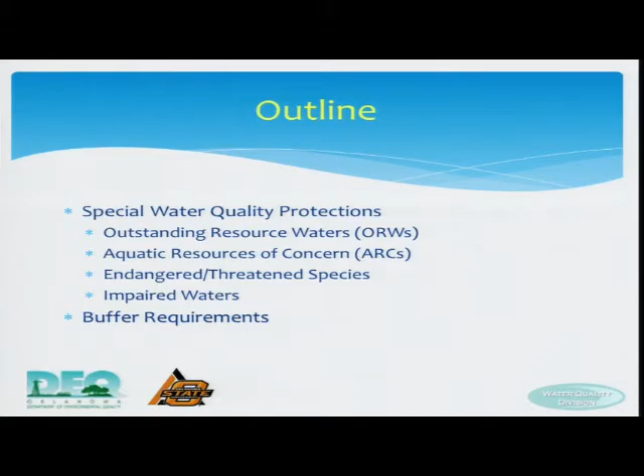So a little bit of just an outline of what we're going to talk about. We're going to go through in more detail special water quality protections. We talk more about ORWs, ARCs, outstanding resource waters, aquatic resources of concern, endangered and threatened species, impaired waters, and then we're going to go through the buffer requirements. And then Dr. Vogel's going to follow me up, and he's going to talk about the models that are available to calculate sediment load reduction.

So special water quality, we've covered a lot of this already today, so we'll kind of go through this a little bit quickly. I don't think you guys will mind too much if we end early. I don't know. I think you guys will be okay.

So ORWs, again, waters of the state designated in Oklahoma water quality standards include Illinois River and Lee Creek watersheds, as well as the Mountain Fork River watershed. Addendum F of OKR10 indicates the locations.

We also tried to pull up FlexViewer, which is why we're having so many difficulties with technology. We wanted to get internet access and we didn't have it, so we can't go through that. We're hoping we can get that resolved tomorrow and go through a live demonstration of how to use our FlexViewer on our website. So fingers crossed that that works, and if you won't be here tomorrow, I apologize that we couldn't make that happen today.

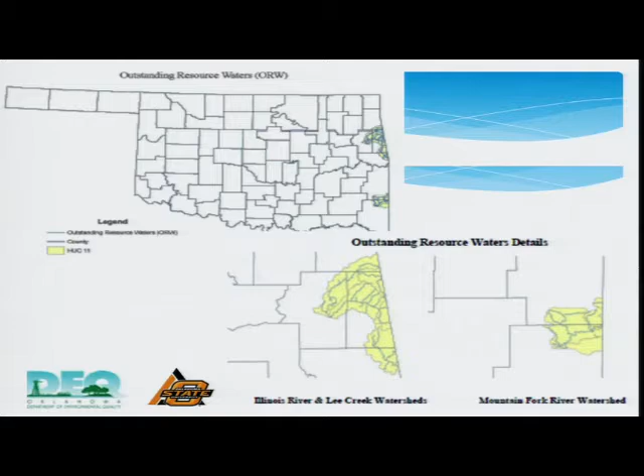The map you guys should be familiar with, showing where Illinois River and Lee Creek watersheds are located, as well as the Mountain Fork River watershed. The aquatic resources of concern include sections of the following that you can see here, such as the Grand Neosho River, Cimarron, South Canadian, Mountain Fork, Spring River, Illinois, etc. That includes certain watersheds as well.

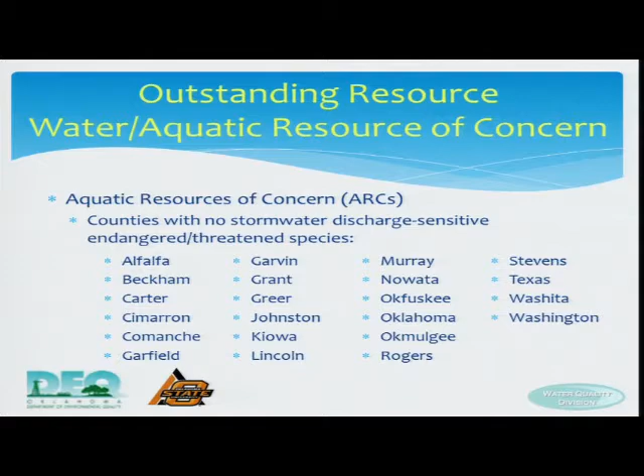What you should note is that there are certain counties that don't have any stormwater discharge sensitive endangered or threatened species. And those are listed here. So if you're working in one of those, you're not in an ARC. So that's good to know. All right. The updated map is here that shows the watersheds that are aquatic resources of concern.

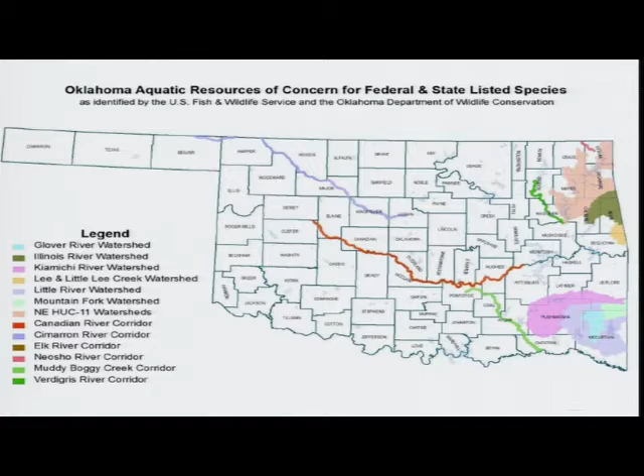Again, what are these requirements that we have for these ORWs and ARCs? Make sure that you indicate that you're in one of these on your notice of intent and address it in your SWP3. I talked about that before. The inspection requirements are a minimum of once every 7 days and within 24 hours of a stormwater event of ½ an inch or greater, or within 24 hours of snowmelt related discharge, like Michelle was talking about in her presentation.

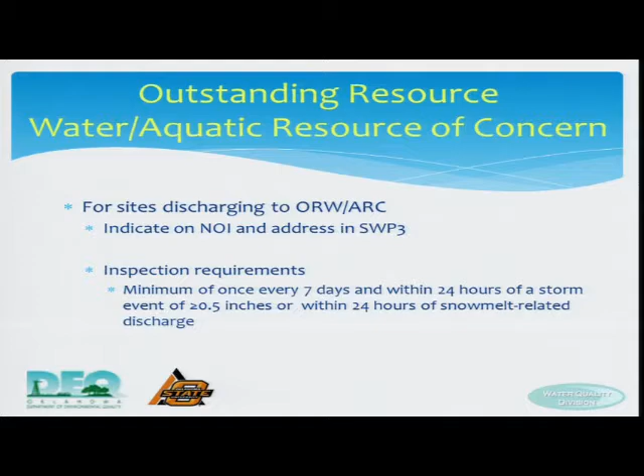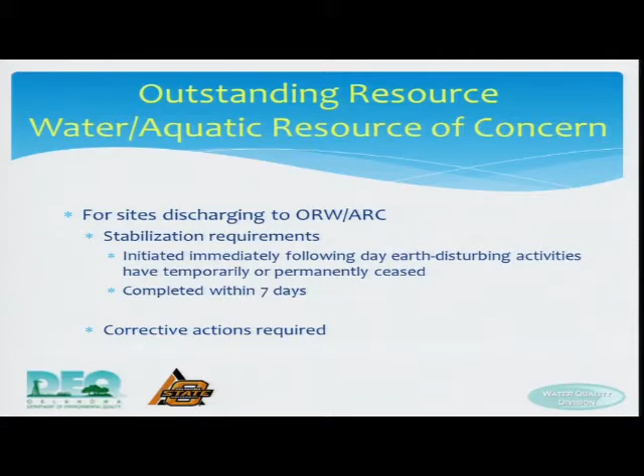Stabilization requirements for your sites if you're in these watersheds, like we talked about, they should be initiated immediately following the day earth disturbing activities have temporarily or permanently ceased. So again, the emphasis here is on getting cover in place as soon as you're done disturbing it to minimize the sediment that's exposed. And then complete those stabilization requirements within 7 days. Corrective actions are required, as Michelle talked about in her presentation.

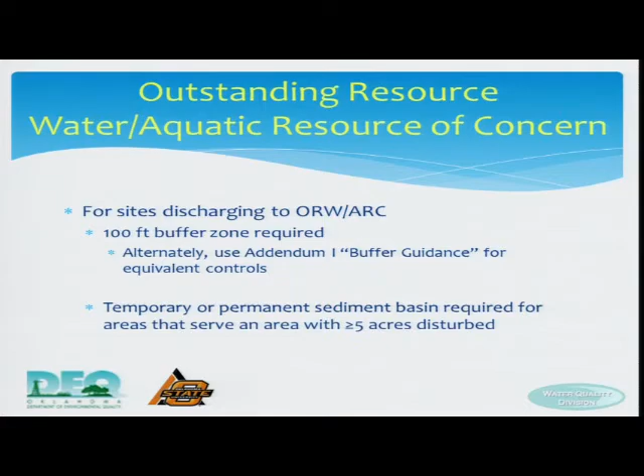For sites that discharge to ORWs or ARCs, there's a 100-foot buffer zone required. We touched on that a little bit this morning. And if you can't provide the entire 100 feet from the water that's adjacent to your site, as an alternative, you can use Addendum I, which is a buffer guidance that we included in the permit to determine what kind of equivalent controls you could put in place instead of providing that buffer.

And then again, with the sediment basin, either a temporary or permanent sediment basin should be provided for areas that drain 5 acres or greater to 1 point.

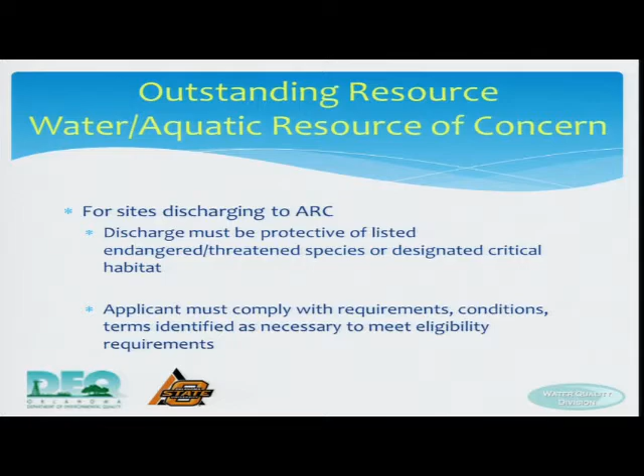Specifically for sites that discharge to ARCs, they have to be protective of the listed or endangered species or the designated critical habitat if that applies. And you have to comply with all the requirements and conditions that are necessary to meet the eligibility requirements. Should note that the permit does not authorize discharges that cause a prohibited take or that are likely to jeopardize continued existence of the species or habitat.

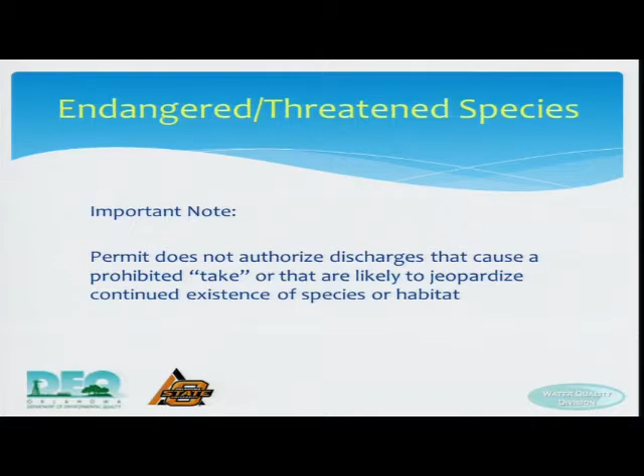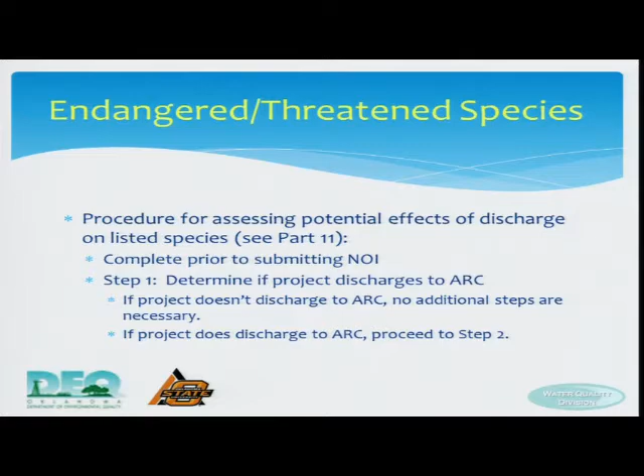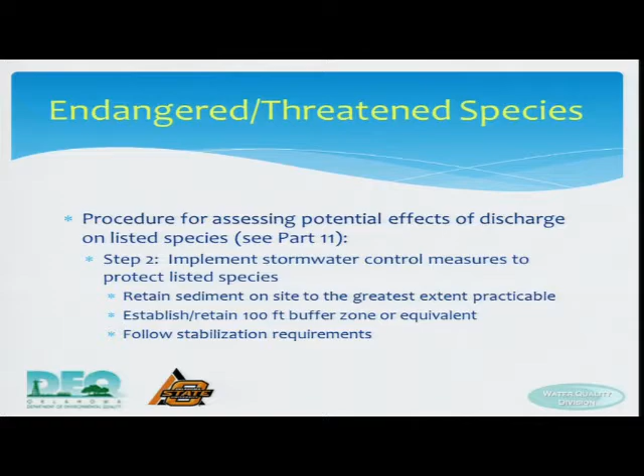And the procedure for assessing the potential effects of your discharge on one of the listed species is covered in Part 11 of the permit. You need to go through that process before you complete or submit your NOI. The first step in that process is to determine if you actually are in and will discharge to an ARC. If you don't, then you're done. You don't have to do anything further with it. But if you do, then you have to implement stormwater controls that protect that listed species. So as part of that, retain sediment as much as you can, establish the buffer zone or provide the equivalents, and then follow the stabilization requirements.

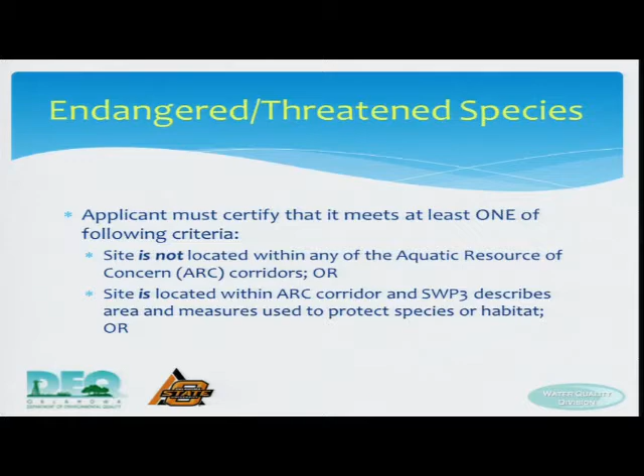You have to certify that you meet at least one of the following criteria as part of this process, either that you're not in an ARC, or if you are, that your SWP3 then describes where that area is and the measures that you're going to use to protect your species or habitat. Or if you can't do that, then you must certify that the site is federally approved or authorized and addresses Endangered Species Act Section 7 consultation. So include that documentation in your SWP3.

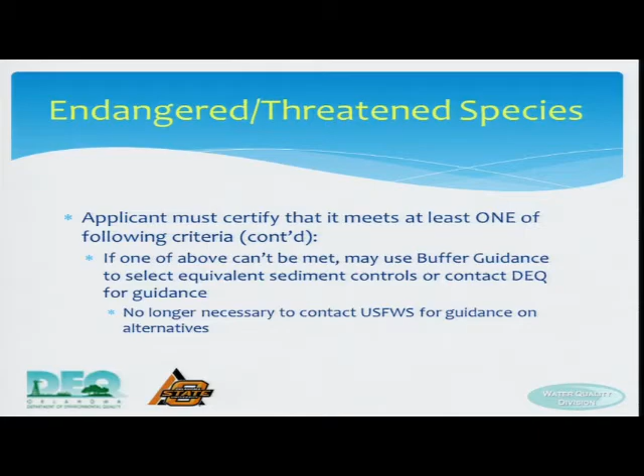Or if you can't do that, then if there's another site that another operator has, you can use their certification of eligibility on that. If you can't meet any of those above, then you can use the buffer guidance to select equivalent controls, or you can contact DEQ for guidance. It used to be that you'd contact U.S. Fish and Wildlife. They would prefer now that you just contact DEQ, and then we will help you with that on determining alternatives for equivalent sediment control.

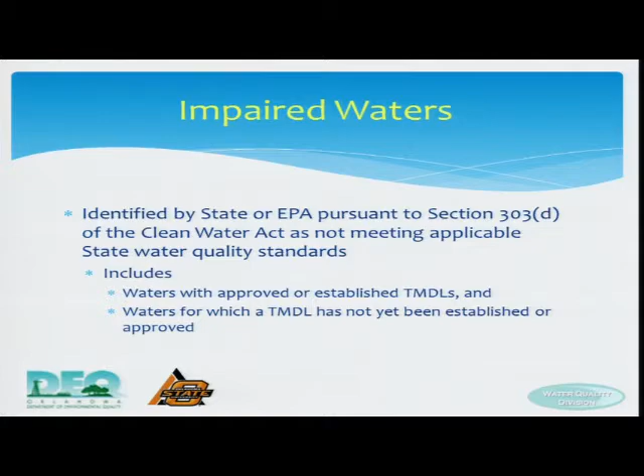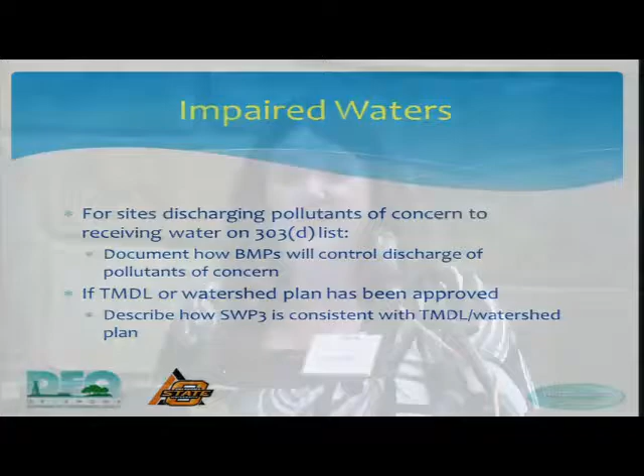If you discharge to receiving water that's on a 303(d) list, you have to document how your BMPs will control the discharge of the pollutants of concern. So whatever that pollutant is, make sure you find a way to address that. And if there is a TMDL in place or there's a watershed plan that's been approved, then you have to make sure that your SWP3 is consistent with whatever is in that TMDL. For sites that are within a mile of the streams that are impaired for sediment, make sure that you indicate that on your notice of intent.

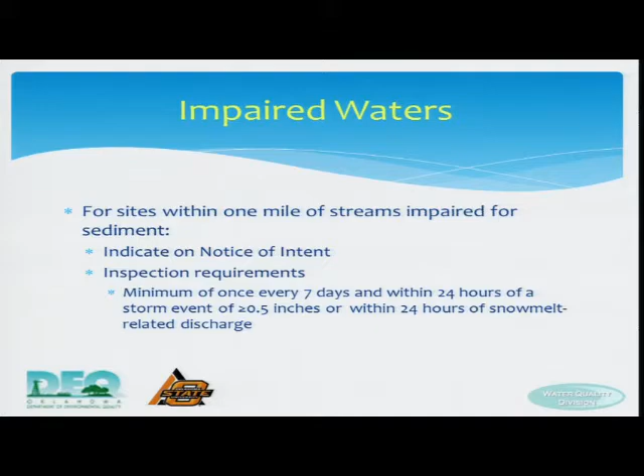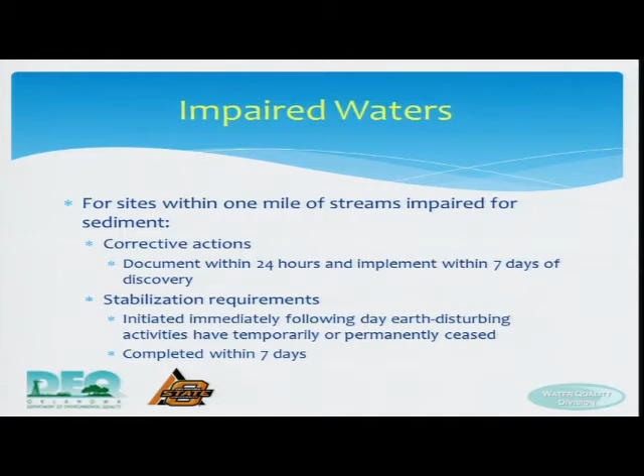Again, the inspection requirements are once every 7 days and within 24 hours of a storm event of a ½ inch or greater, and snow melt related as well. You have to document your corrective actions within 24 hours of discovery and implement them within 7 days. Stabilization, again, same requirements as for your ORWs, ARCs, immediately following the day the earth disturbing activities have ceased and completed within 7 days. All right, so that's the basics on what's required for impaired waters and then ORWs and ARCs. So now we're going to talk about the buffer requirements.

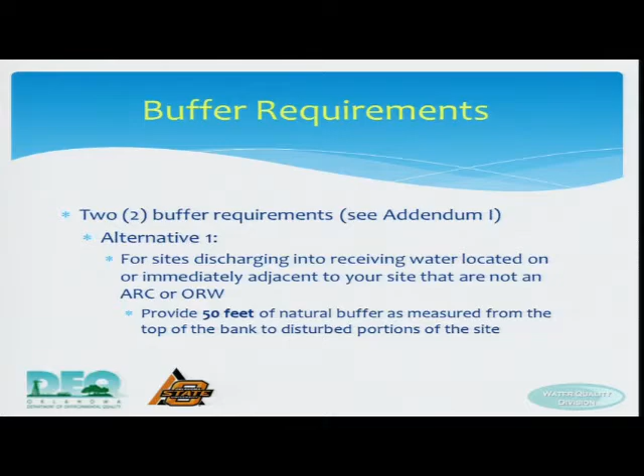There's 2 buffer requirements. The first alternative is for sites that discharge to waters that are not an ARC or an ORW. So for those of you that are in this area, you've got a creek or a stream that's either running through your site or immediately adjacent to your site. You have to provide 50 feet of natural buffer undisturbed as measured from the top of the bank to the disturbed portions of the site. Okay.

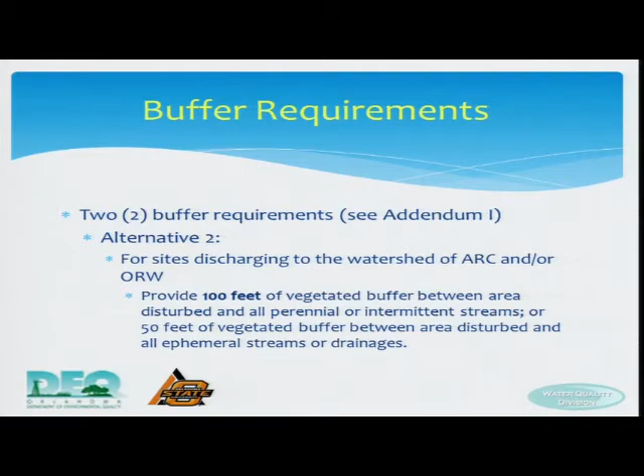If you're in the ARC or an ORW, then it's the 100 feet vegetated buffer that you have to provide for perennial and intermittent streams. For those ephemeral streams or drainages, it's reduced down to 50 feet that you have to provide on that one.

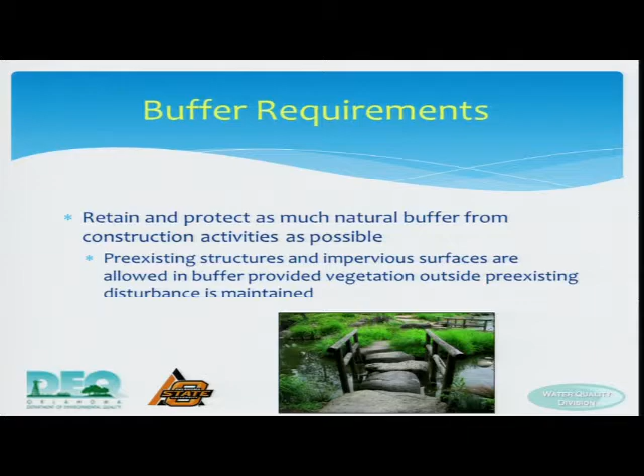Okay? And what we want you to do with this buffer requirement is to retain and protect as much of the undisturbed natural buffer from your construction activities as possible. And you have to do that through the final construction, through complete build out of your site, so the length of the project. If you have pre-existing structures or impervious area already in the buffer area that you would need to protect, if it's pre-existing, then it's allowed to be there. You'll just have to document that and figure that into it. You should have some undisturbed beyond that if you can provide it. If not, there are some alternatives that we'll talk about.

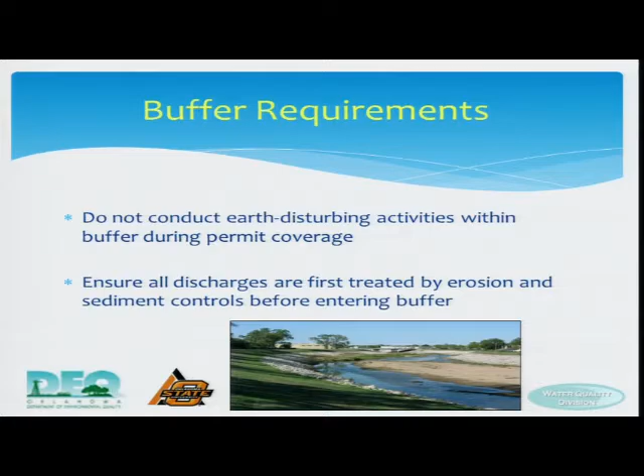And then once you've got that buffer, if you've decided you can provide any buffer at all on your site, then you need to make sure through the length of your project that there are no earth disturbing activities that are conducted within that during permit coverage. And then ensure that all of your discharges are first treated by erosion and sediment control before they enter the buffer. So you don't want to have just sediment-laden water hitting that buffer without encountering, say, silt fence that you're using as your perimeter control first.

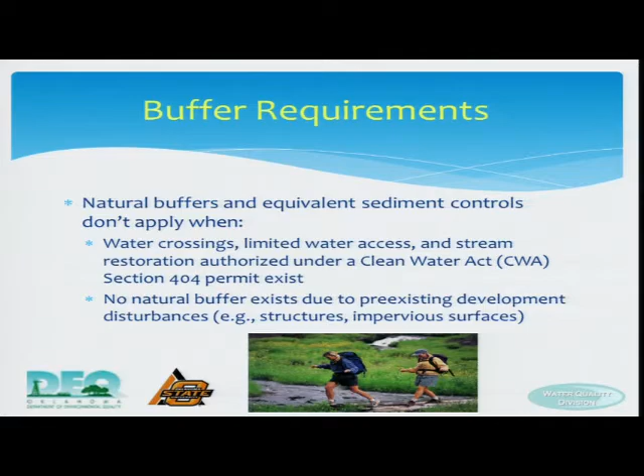Okay, and again, if you have water crossings, limited water access, or you have a 404 permit for stream restoration activities, then this buffer requirement does not apply. Or if you have a site where no natural buffer exists because of pre-existing development, then again, the buffer requirement does not apply. Okay, so hopefully that's a little bit clearer as far as who needs to have buffers and how big your buffer has to be. And so there are some compliance alternatives.

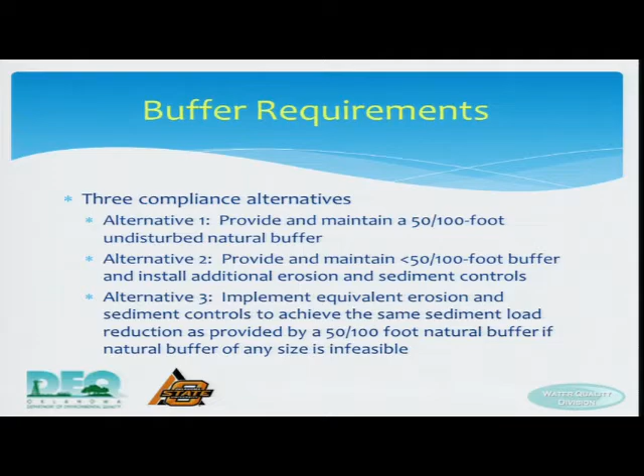If you cannot provide the 50 or 100-foot buffer that's required, there are some alternatives. The first alternative is go ahead and provide it if you can. If you can't, how much can you provide? If you can provide 25 feet, try to maintain that and then provide some sort of equivalent control that will reduce sediment to equal what a 50-foot or 100-foot buffer would have provided. And then alternative 3 is you can't provide any buffer at all. It's just not possible with your site conditions. If that's the case, then you have to put in equivalent erosion controls that would achieve the same sediment load reduction that a 50 or 100-foot buffer would have provided had you been able to put one there.

Okay. So one way you can figure out what kind of equivalent controls you would need to put in place is use Addendum I in the permit. It spells out all of these steps and will walk you through this process. The first is to determine, first of all, is a buffer required? If it is, which compliance alternative are you going to use? 1, 2, or 3. If it's alternative 1, measure your existing buffer width and retain and protect that buffer width. So go out to your site, measure it off, and find some way to identify it to your bulldozer operator that he can't go any farther than this when he's leveling out the site or doing whatever activity that he's doing.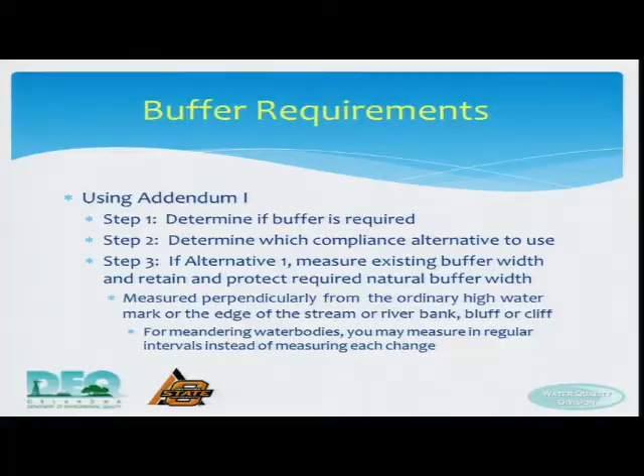And then the way it's measured is perpendicularly from the ordinary high water mark or the edge of the stream. And then for meandering water bodies, just measure it at regular intervals. This is an example of, in order to measure here, what you'd do is you'd find where the vegetation starts to establish itself and be pretty well covered there, you start there and measure back towards your construction site. And if this is 10 feet and then this is 40, then you've got your buffer here.

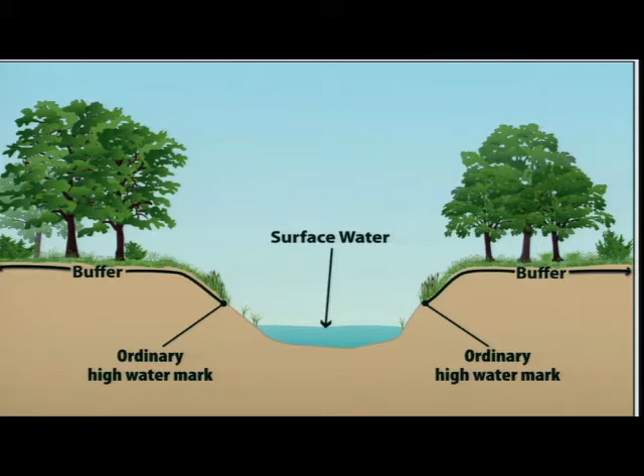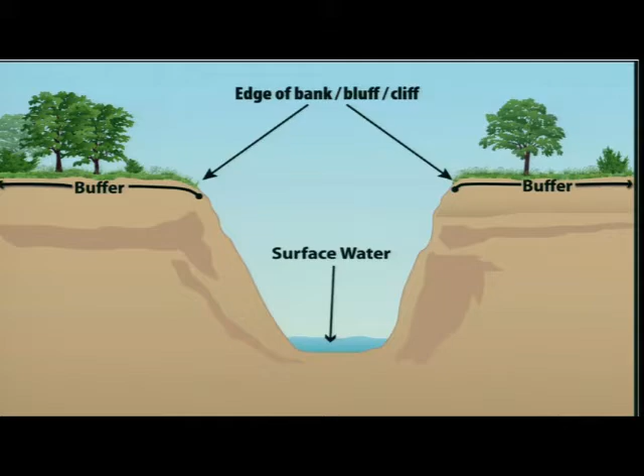It's not a straight line. You don't have to have 50 feet linearly this way. However long that slope is, that all counts into your calculation of whether that's 50 or 100 feet that you can provide. So bear that in mind when you're measuring for your buffers. If, however, you've got a channel like this near your site or running through your site, then you're not going to have as much slope that you can take credit for. You're going to have to measure from here back when you measure your buffer width. Okay?

If you can't provide the entire 50 and 100 feet, and you select alternatives 2 or 3, if you select alternative 2, document the width and location of the buffer that you can provide in your SWP3. So include that on your site map if you can, or put a narrative in there. It's one of those things, as we work through it, we'll refine the process, but make sure it's listed in there in some way so that we can find it and know what you can provide and where it's located.

Document why it's infeasible to provide the entire length or any at all. Again, like Joe said, or others have said, paperwork is key on this. Documentation is key. We like to see the documentation. So make sure you're doing that. Determine what additional controls must be implemented along with any of the retained natural buffer. Okay, and the process is listed in Addendum I, and we're slowly working our way towards that. So it'll be a BMP of some kind that you put in place, or a combination of BMPs that you put in place to provide that equivalent sediment reduction.

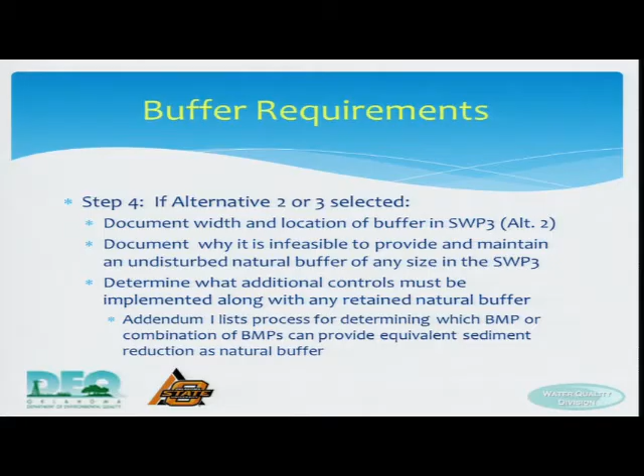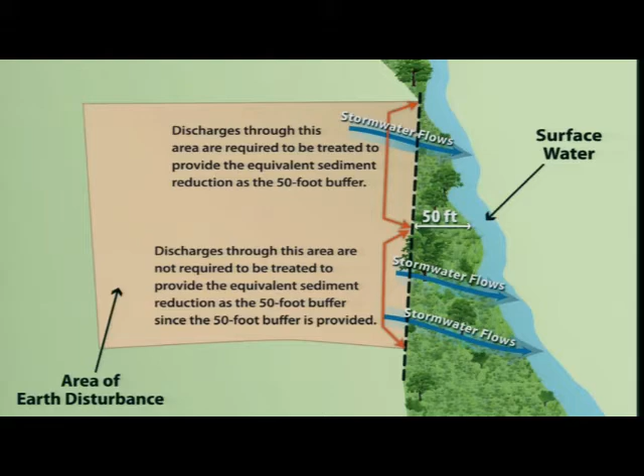Okay, so for instance, if your site looks like this, there may be a point where you can provide, say you're in Oklahoma County, the 50 feet of buffer. You won't have to do anything additionally on this part of your site. But up here at this part of your site where you can't maintain the 50 feet, then you'll have to put some other controls in place in order to match up that equivalent sediment reduction. Okay?

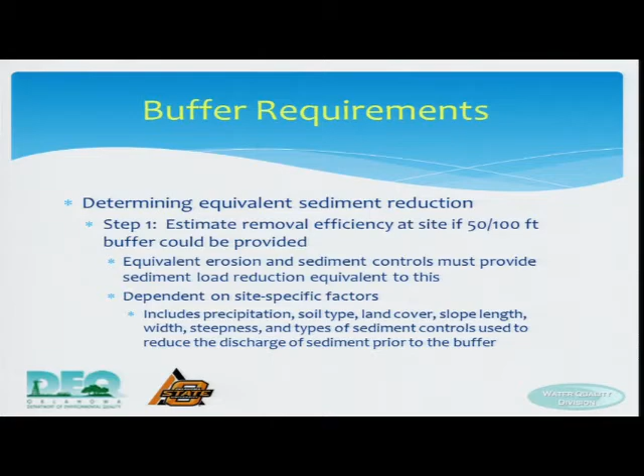So in order to determine equivalent sediment reduction, you have to first estimate what the removal efficiency is at a site if you could provide the 50 or 100 feet buffer, and then provide the equivalent sediment controls. It's dependent on a lot of site-specific factors, precipitation, soil type, etc. But you can use the tables in Appendix I, tables I-1 through I-4, in order to run through this calculation. That's one route. You can use the tables. That's one route we've provided for you.

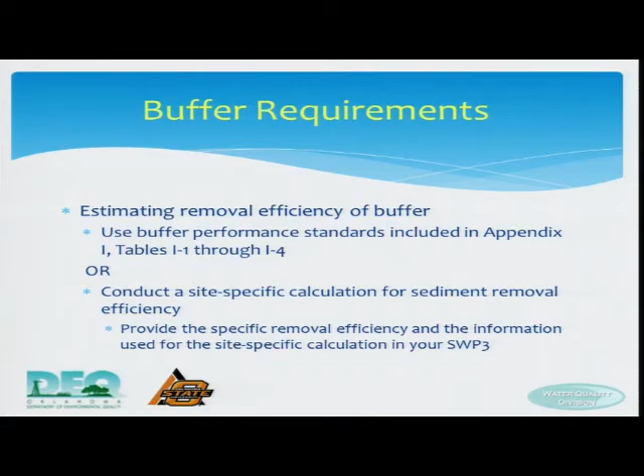If you decide not to use the tables in the permit, then you can use a site-specific calculation for sediment removal efficiency. There are plenty of tools out there. There's the Revised Universal Soil Loss Equation and some other models that Dr. Vogel's going to talk about that you can use to do this calculation, or you can use Appendix I. And I'm going to run through how to use the tables in Appendix I. And one thing I wanted to note is that these tables were developed by Dr. Vogel and Katie Bites at OSU. And we appreciate their hard work on getting those tables developed for us.

And you have to choose the vegetation type that most closely matches the vegetation that would have existed naturally, regardless of what condition it might be in. So if you had weeds out there, it's not like you would have to go out and plant a specific type of grass in that buffer area. You would just use the natural condition, which is weeds.

Okay, so I'm going to walk through an example. Hopefully this will work. I haven't tried this type of example out yet, so you're going to be my test audience. So here's how I thought about doing this. I'm developing a commercial site in Oklahoma City. How do I know if I need to have a buffer? That's one thing.

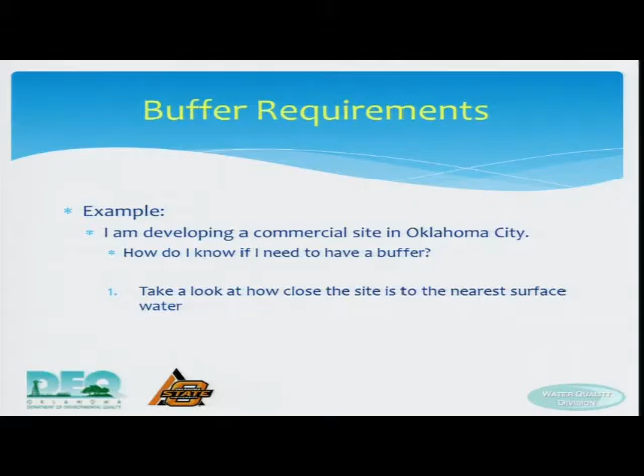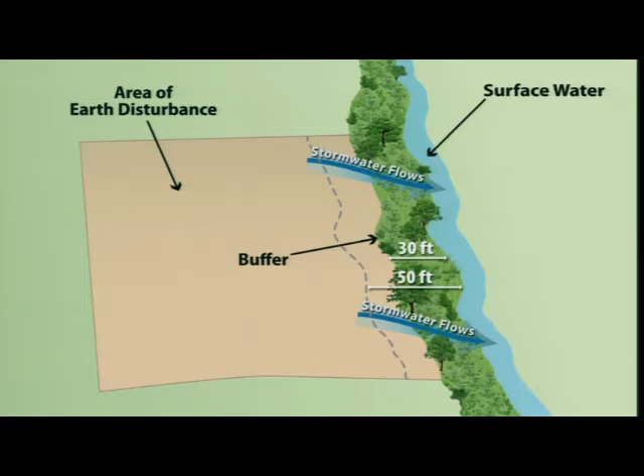Okay, so take a look at your site and how close it is to the nearest surface water. In this case, you're adjacent to a surface water, and we're going to say you own and are going to develop this entire site, so you have control of all of this. So you will have to provide a buffer. These requirements do apply to you. Okay, so we've got that. You've looked at your site, and it looks like you're going to need to clear ground within the 50 feet of the stream buffer.

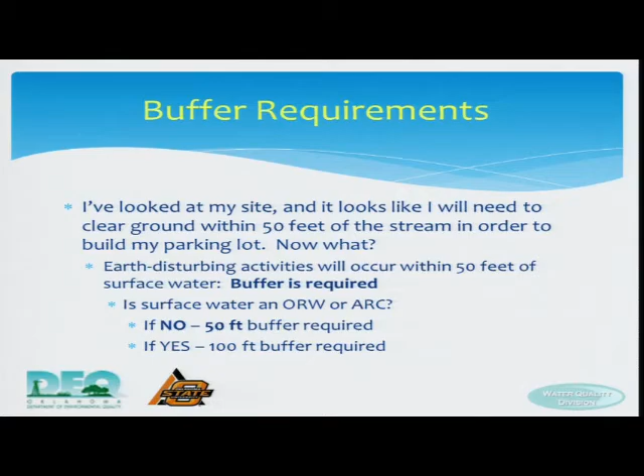Okay, so we know we're in Oklahoma City, so it's likely we're not in an ORW or an ARC, right? So this isn't going to apply to us. We're going to need to have 50 feet of buffer. But I've looked at what's going to go on at my site, and I'm going to need to clear ground within that 50 feet in order to build whatever it is, a parking lot in this instance.

Now what do? So you know you can't provide the 50 feet, so alternative one is out. Okay, well, a buffer is required, not an ORW, so you need your 50 feet. You know you need 50 feet, you can't provide it, what's next? If you can't provide it, then what you're going to have to do is determine how much of a buffer can be provided and what equivalent sediment control measures you're going to install instead.

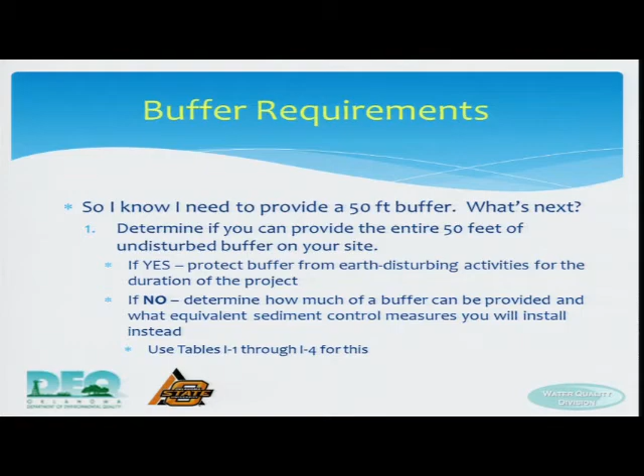Okay, so we know we can't maintain the buffer. Now what do? You can use the tables in the appendix to determine the sediment reduction of a 50-foot natural buffer. So if I was able to leave that 50-foot natural buffer, here's what my sediment reduction would have been, okay? So we know we're going to need these key pieces of information for the table. We're in Oklahoma City. Our natural buffer vegetation would be weeds if we could provide it. The site condition is a blade fill, and the soil type is a sand, okay?

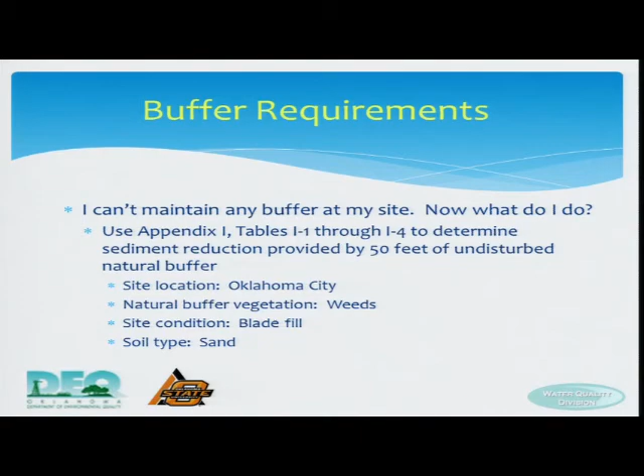So we're going to go to the table. Table I-1 is for a blade fill in the Oklahoma City area. We have weeds, and a 100-foot buffer would provide 48% of sediment removal. A 50-foot buffer, which is what we need for our site, is going to provide 41% sediment removal. So you're going to have to provide equivalent sediment control measures to provide 41% sediment removal. Okay? 41% is where we're headed. This is our aim, this is our goal.

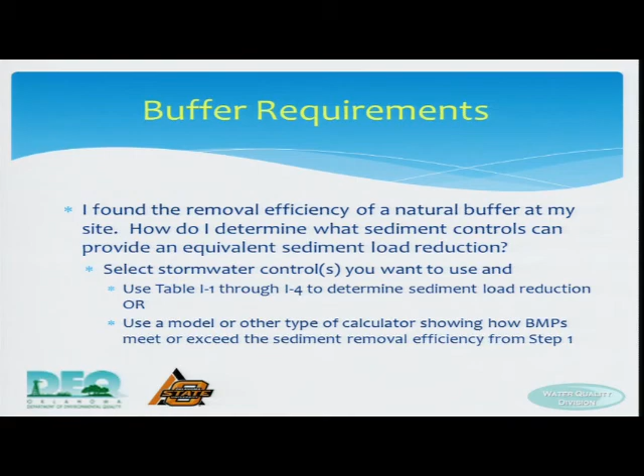So you found what a natural buffer would be. How do you determine what the sediment controls are that would provide an equivalent sediment load reduction? Okay, so we're going to have to select something. In this case, we've got in the table some select BMPs and what their sediment removal efficiency is for specific soil types. So you can either use what's in the table, or you can use another model and model what those sediment controls would do. Okay, for this instance, we're going to go back to the tables.

Okay, so in this one, I decided I want to use a 12-inch wattle as my alternative. So looking at the table, there's what we need to meet, what we need to match. I chose a 12-inch wattle, so using the table, that provides 90% sediment removal. So providing that wattle will meet what a natural buffer would have provided. So that's your equivalent measure. So what you would do then is, on your site, instead of having the buffer, you'd install your perimeter control and a 12-inch wattle, and that will provide the sediment removal equivalent to what a 50-foot buffer would have provided.

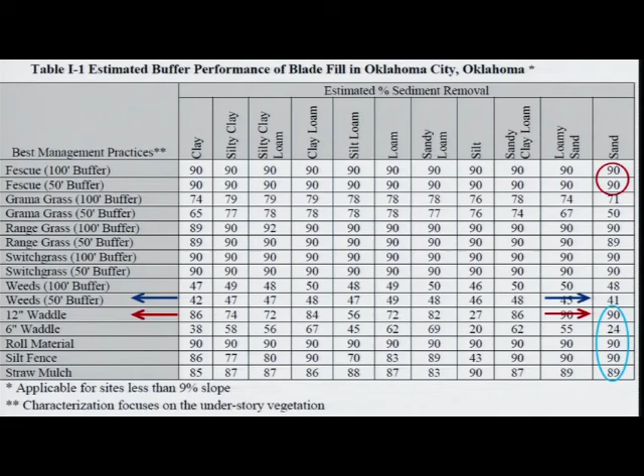Okay. Hopefully that's a little clearer. I know this is going to be an interesting process as we move forward with it. Okay? And just kind of an update on that 90%.

So, are you done yet? You've decided what you're going to put in place. What else do you have to do? Well, here comes the documentation part. Put it in your SWP3. Say that you used Appendix I, if that's what you used. If you didn't, then you'll have to provide us information on the specific removal efficiency and the other information for your site-specific calculation. And you'll have to give us what stormwater controls, what the model was, and the results of the calculation in your SWP3.

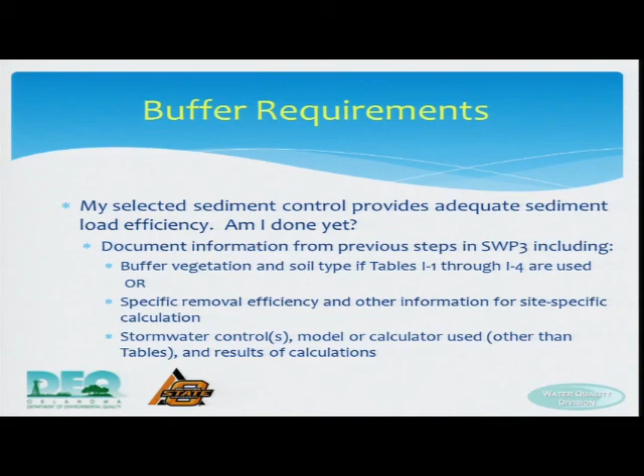So you've got two alternatives. If you use the tables, say you use the tables. If you don't use the tables, then give us the information on the model that you used and what the results were. Okay. Again, so what if you don't use the tables? There are other calculation methods available, and that's what Dr. Vogel is going to talk about.